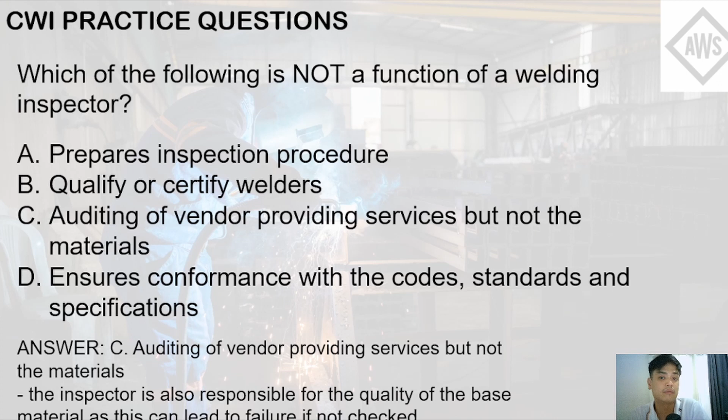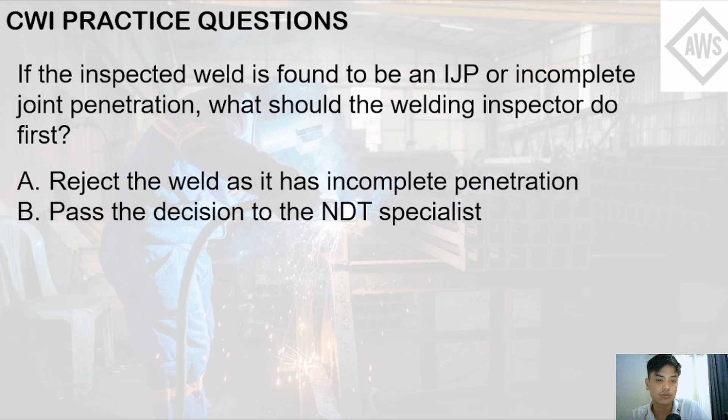Next question. If the inspected weld is found to be an IJP or incomplete joint penetration, what should the welding inspector do first? So this is basically a situational question. A. Reject the weld as it has incomplete penetration. B. Pass the decision to the NDT specialist. C. Clarify the drawing and consult with the design engineer. D. Ask the welder to completely fill the weld joint. So basically, this is part of the communication that the welding inspector needs to conduct during his day-to-day activity.

Basically, here is letter A. It states that you need to reject the weld as it has incomplete penetration. So basically, some welding procedures, specifications or drawings may not accept incomplete penetration, so that can be an answer. Letter B, pass the decision to the NDT specialist.

So not quite. The choice here is vague. You may not need to pass the decision to an NDT specialist here; it need not be specific to a non-destructive testing specialist. It's just incomplete joint penetration. Basically, you can see the discontinuity or the defect just by looking at it. So the NDT specialist may not be the one that needs to be consulted immediately.

So letter C, clarify the drawing and consult with the design engineer. So basically, some specifications or drawings specify if the structure or the components to be welded are just incomplete joint penetration.

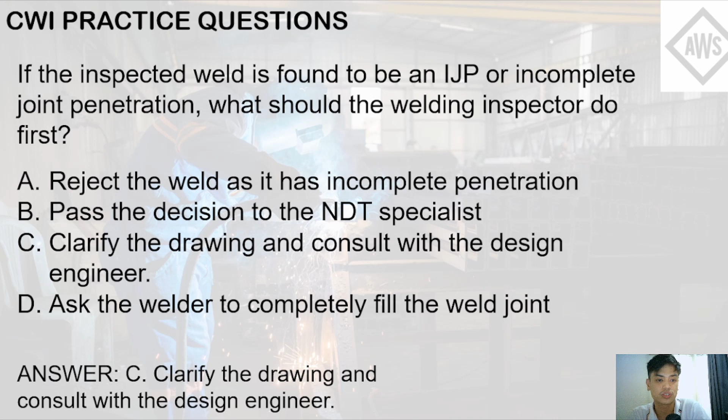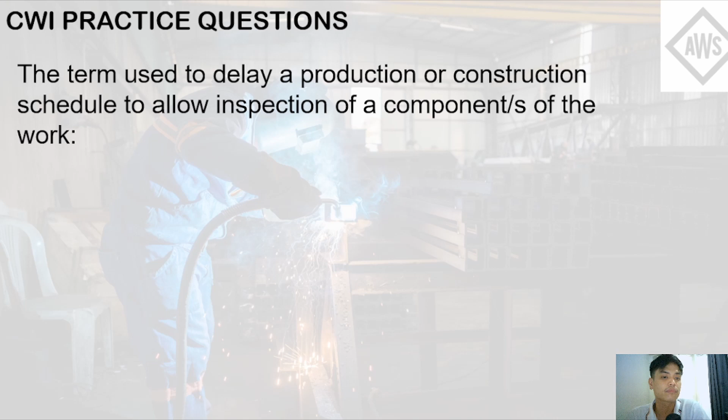Next question. The term used to delay a production or construction schedule to allow inspection of a component or components of the work. So basically, this term is indicated in the inspection test plan. A, pre-construction, B, inspection point, C, witness, D, hold point. So letter A doesn't make any sense. Pre-construction doesn't align with what the question is asking for. Inspection point is a more general term. Witness is one of the points that is indicated in the inspection test plan. D, hold point. Basically, this is the answer. It delays the production or construction schedule to allow inspection of a component.

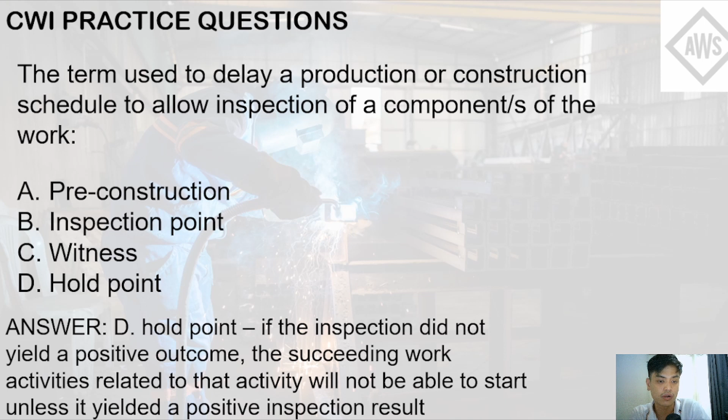So what's the impact of a hold point? The hold point is if the inspection did not yield a positive outcome, the succeeding work activities related to that activity will not be able to start unless the test yielded a positive result. For example, the welding inspector may need to inspect first the weld joint preparation done by the fitters or the welder before proceeding with the root pass, the hot pass, etc. So he may indicate in the inspection procedure or the test plan that the inspection for the joint preparation is a hold point. Thus, if he finds it unsatisfactory, the welder needs to rectify the joint preparation to the acceptance criteria so as to proceed with the succeeding activity, basically to weld the joint.

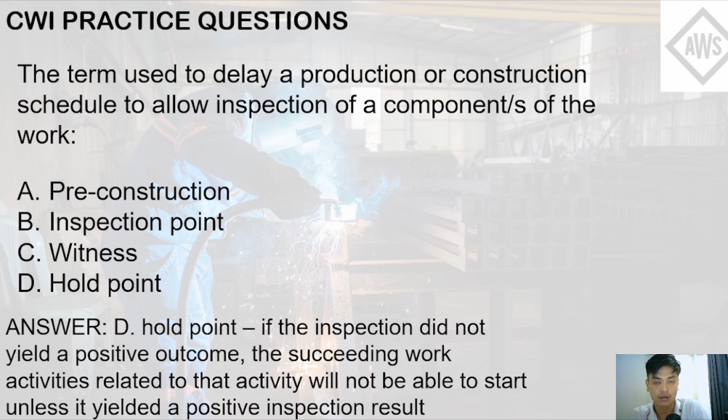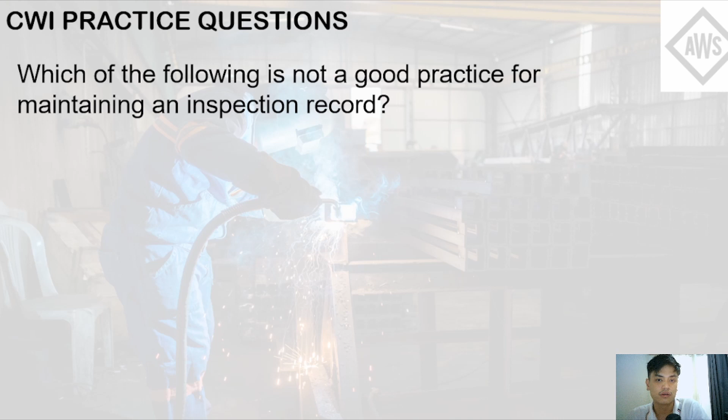Next question. Which of the following is not a good practice for maintaining an inspection record? Signing the inspection record; indicate the job name, location, and specific test information; ink or typewritten. Basically, the inspection record needs to be in ink or typewritten by a computer. The errors are single lined out. So letter A, the welding inspector or the one that created the inspection record needs to sign the inspection record. So he needs to be accountable for it by signing his name.

Indicates the job name, location, and specific test information. So it is essential that the inspection record has a corresponding job activity and where the location may be. For example, if it is a plant, the specific location where the activity is conducted in that plant, the production area, for example, and the specifics of the testing that is done. So what is the acceptance criteria, what tests and procedures are done, etc. And it needs to be in ink or typewritten.

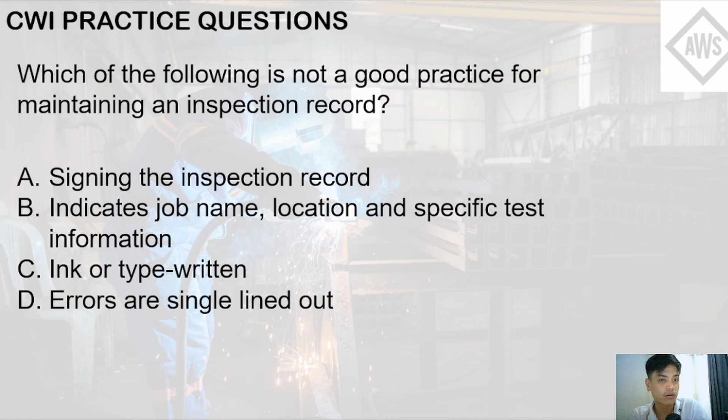Errors must be single-lined out, and what is missing in this choice, it needs to be initialed. So if errors are made in the remarks in the inspection records, they must be single-lined out and initialed by the one who did it. Basically, it is the welding inspector that made those remarks. So if he has errors on it, they need to be initialed as well.

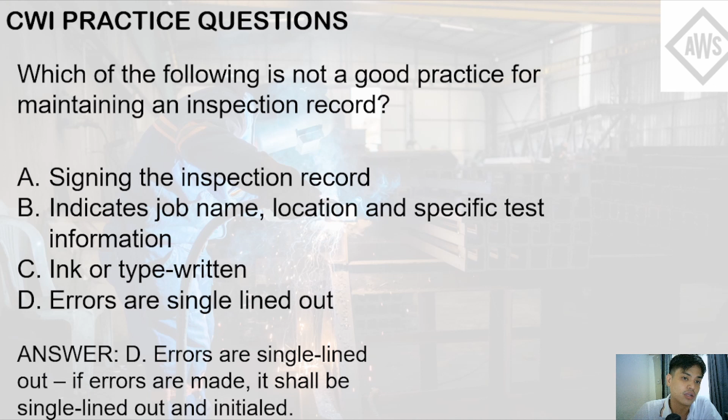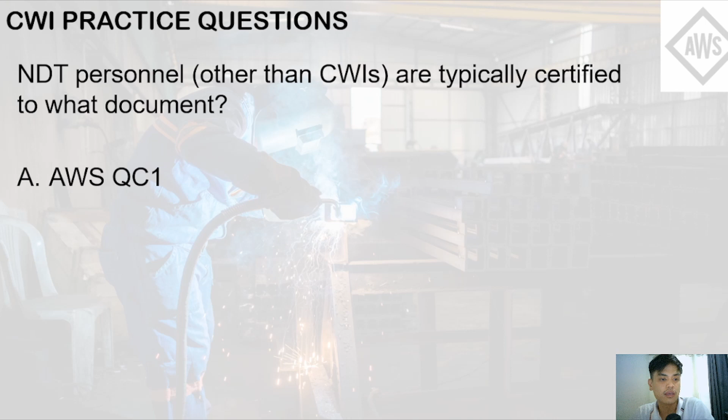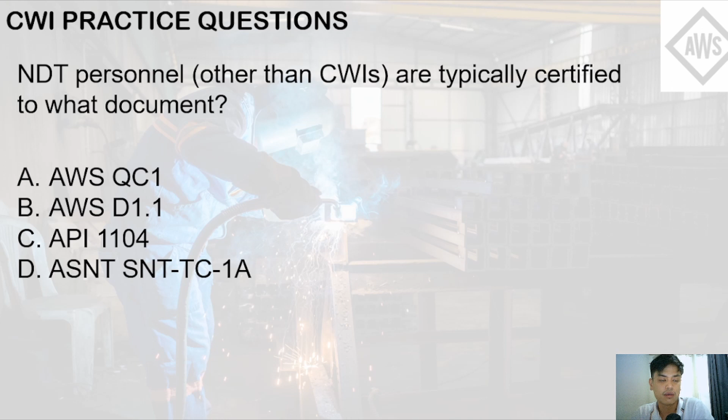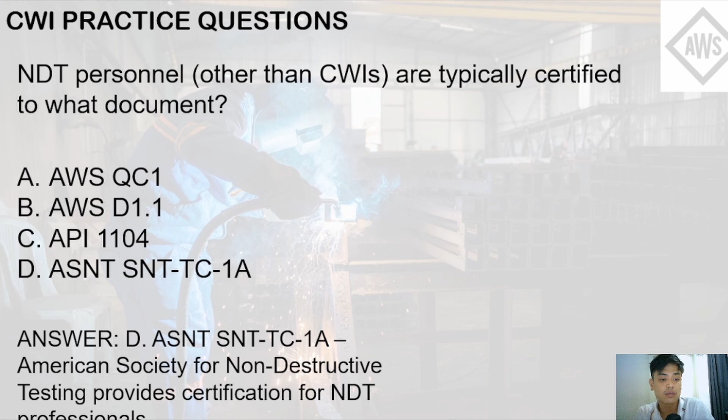Last question. NDT personnel other than CWIs are typically certified to what document? Letter A, AWS QC1, B, AWS D1.1, C, API 1104, D, ASNT SNT-TC-1A. So the answer here is letter D, ASNT, which stands for American Society for Nondestructive Testing. Basically, this certifying body provides certification for NDT professionals.